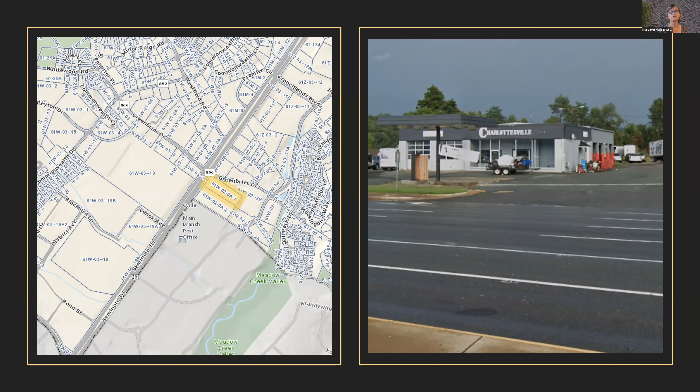This is an application for a Wawa convenience store and fuel pump canopy to be located at the southeast corner of the Route 29 and Greenbrier Drive intersection. The staff report for this application addressed the site plan for the proposal. It did not provide an analysis of the architectural design of the store or the canopy, although there were a few references to architectural issues based on information available in the site plan. There was a glitch at our end in the submittals. The architecture was part of the applicant's submittal and it should have been addressed in the staff report. So in this presentation, I'll first summarize the site plan issues covered in the staff report, and then we'll come back to the architecture.

Regarding the site plan, we did identify some issues that will need to be addressed with the future submittal. They range from landscaping and lighting to issues with equipment, the dumpster, and the canopy. The landscaping does not meet all of the guideline requirements, in part because of the extent of utilities and easements on the property. There are spacing issues: large trees are provided along the frontages, but they're spaced very close together, and there are also gaps in the planting of trees and shrubs along the frontages.

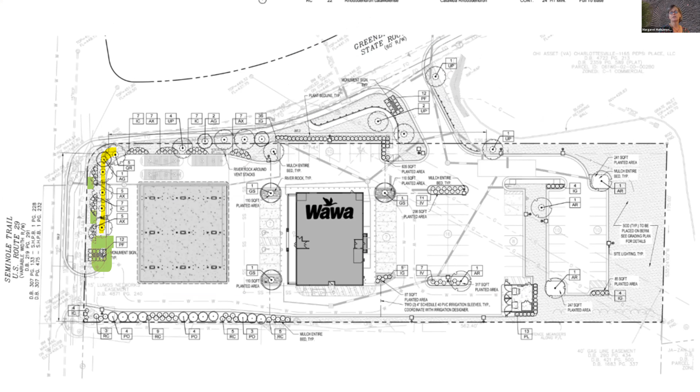Trees are not shown along all the perimeters of parking areas as the guidelines require, and there's no landscaping shown along the property line to offset impacts of the loading area. So we've made recommendations to address each of those issues.

The lighting plan shows that there's excessive spillover at the Route 29 entrance and along Greenbrier Drive, and there's also excessive illumination under the canopy.

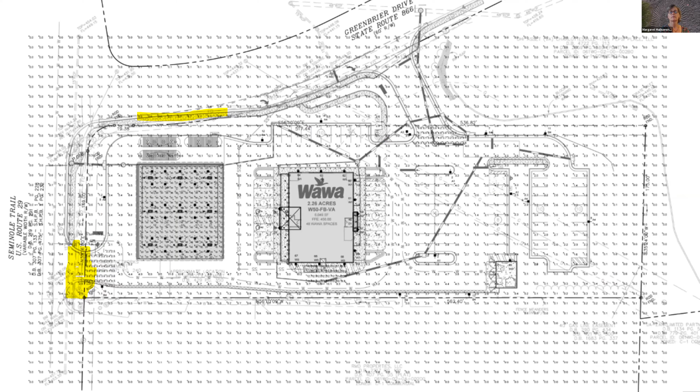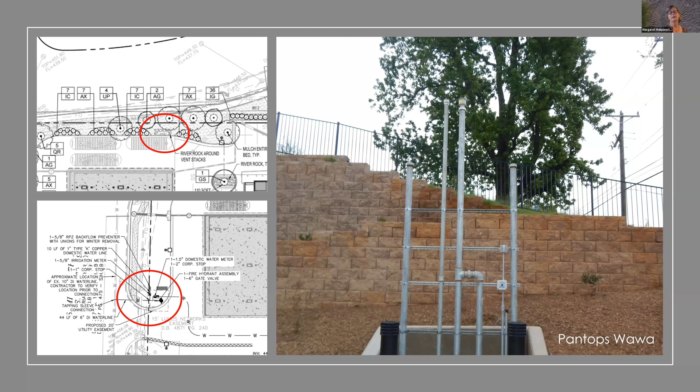In terms of equipment, the vent stacks for the underground storage tanks will be visible from the street. They're located very close to Greenbrier Drive, and a fire hydrant and water meter are located right at the entrance into the site from the Route 29 entrance corridor.

We've recommended moving these items and adding landscape screening. A berm is proposed at the rear of the site, and chain link fence is proposed at the northeast corner of the site. We've recommended grading for a more natural appearance and an alternate fence design.

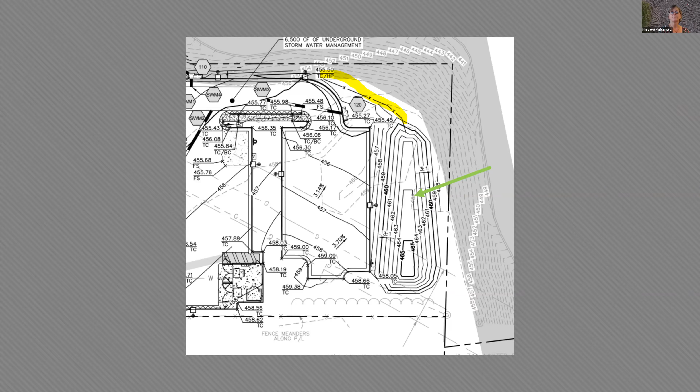The proposal includes a dumpster structure like the one approved at Pantops. The proposed location is right in line with the entrance from Route 29. The Pantops dumpster was approved with gates that are white.

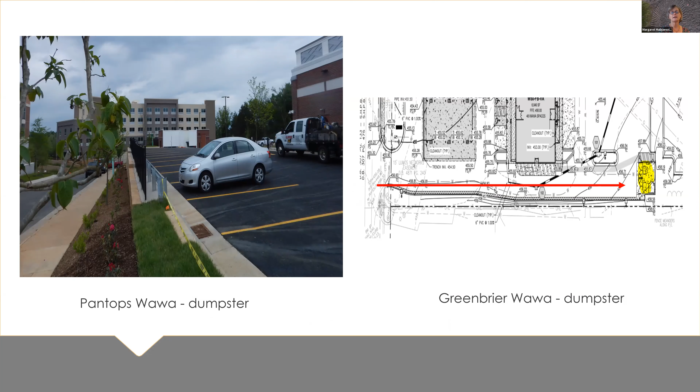That white color really stands out, as you can see in the photo on the left side of this slide. So we've recommended a more muted color that would blend better with the surroundings.

All right, let's talk about the proposed architecture. The design of the store and the canopy are proposed to be the same as what was approved for the Pantops location. There are a few items to note.

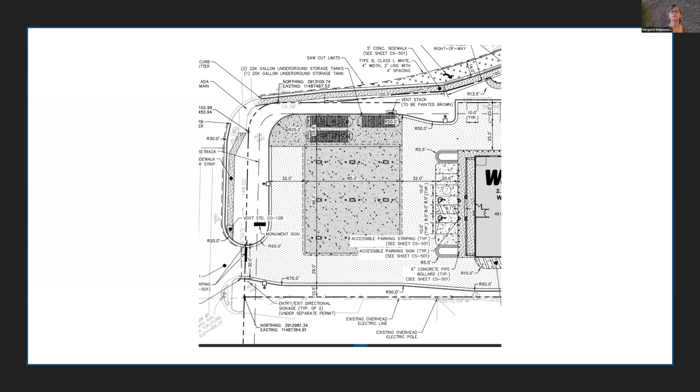One issue is the size of the canopy. The approved Pantops size is 96 feet by 81 feet, and the Greenbrier size on the site plan is 96 feet by 85 feet. So we've recommended revising to the smaller size.

Another issue to note is that the right side elevation of the store building has much greater visibility at the Greenbrier site than at the Pantops location. The elevation does have some detailing, but has no windows and just one service door.

As mentioned earlier, the loading area is proposed along this elevation. So we've recommended that some landscaping be added along the perimeter of the site to offset those visual impacts.

Also, there's a discrepancy in the information for the canopy. The architectural drawings show dimensions like those approved for Pantops, with the bottom of the eave at 14 feet 6 inches, which in earlier reviews was determined to be consistent with the entrance corridor guidelines.

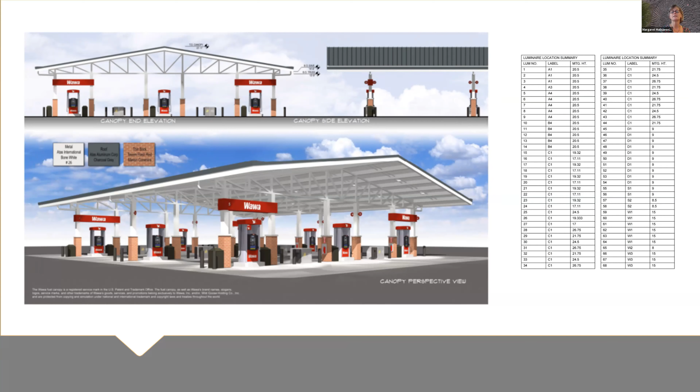The top of the canopy is noted at 22 feet 11 inches in the architectural drawings, but the luminaire summary in the lighting plan shows canopy fixture mounting heights up to almost 27 feet. So the lighting plan doesn't represent the canopy shown in the architectural drawings, and revisions will be needed to the lighting plan. So I'll run through the architectural drawings.

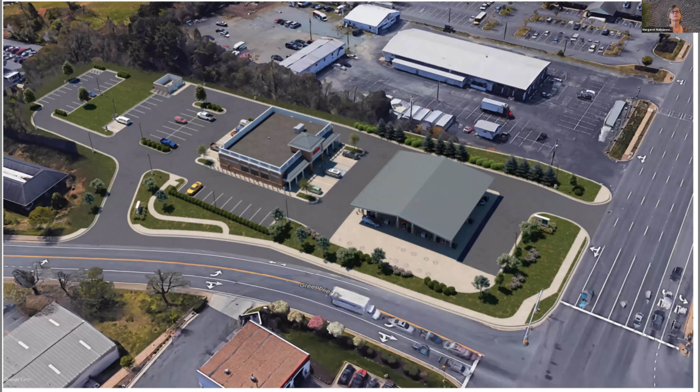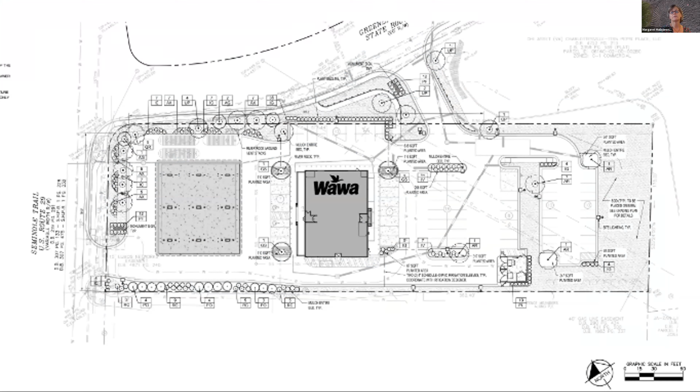As I noted, the design is the same as the Pantops location, and even these drawings still show the Pantops street names. So although the staff report did not include a detailed architectural analysis, the report did address the few architectural issues we identified based on available information. After looking at the architectural drawings submitted, the only additional recommendation I'd make at this time would be to correct the street names in the elevation drawing titles.

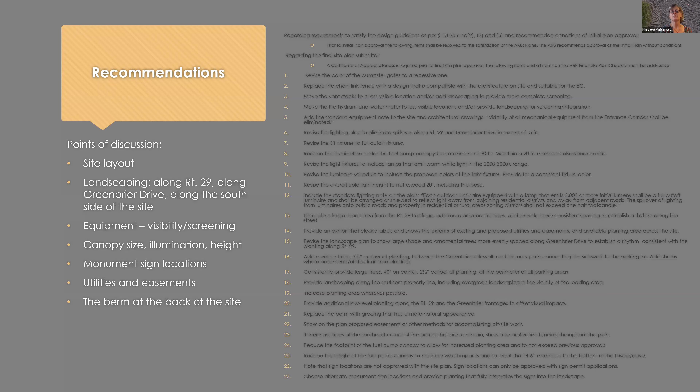So our recommendation is approval of the initial site plan with no conditions on that initial site plan, but with a list of recommendations for the final site plan to be submitted with the next submittal. I'm happy to try to answer any questions that you might have.

I don't have any questions. I have a question for the applicant, but I think no questions for you. Thanks.

Margaret, can you possibly go back to the perspective rendering from 29 heading north? Sure, or looking north? Let me pull that up just a second.

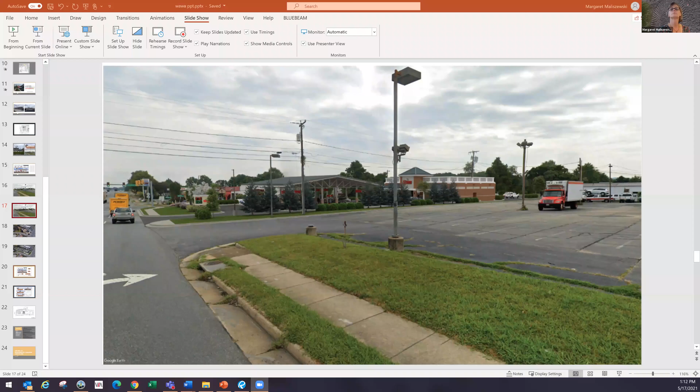Are you able to see the slide? Yep. Okay, great, thanks. Would you like me to leave it up? I think we'll see what the applicant wants to do.

Were there any other questions from ARB members? I just have a quick question, Margaret. Was the door off center on the Pantops building like it is in this application? You remember the front entrance? I guess it's the south elevation. That's a good question, I can maybe check, or the applicant could shed light on that. I don't have those other drawings right here. I'd assumed it was because the labels haven't changed, but... thank you.

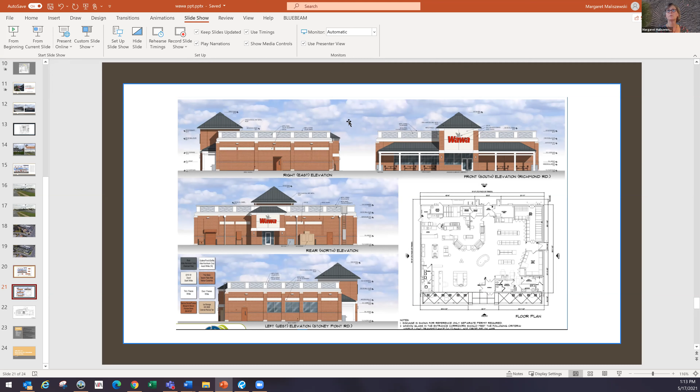Okay, if the ARB members have no additional questions, I think we can move on to the applicant's presentation.

A representative from Wawa who... Yeah, so hello everyone, this is Ryan Perkins with Kimley Horn. We do have Jeff Bell from Wawa on the line as well, and we have Mark Fontaine, the developer with Knoll Consulting, and myself with Kimley Horn and Carter Baum in my office as well. I don't have a presentation prepared, but I can share my screen and run through and address some of your comments. So I'll try to share my screen.

Are you able to see my screen? We are. Good, okay. Just a little bit about the project: we're on the corner of 29 and Greenbrier. It's an existing auto repair service. Here's the oblique rendering that Margaret had previously shown. Our parcel extends pretty far back into the woods, it's a long rectangular shaped parcel, and we're totally wiping out everything on the site today and moving forward with this layout.

So the layout, as Margaret mentioned, is very similar to the layout proposed at the Pantops Wawa, where we have 9 MPDs, the same 6,000 square foot convenience store, and the same amount of parking spaces, which is the code minimum. We have one entrance on 29 and one entrance on Greenbrier at this time. We also have a parking lot in the back that's part of a negotiation with this rehab hospital in exchange for us doing some improvements on their parcel, a small triangle along Greenbrier. Wawa is going to install 20 parking spaces for them to use.

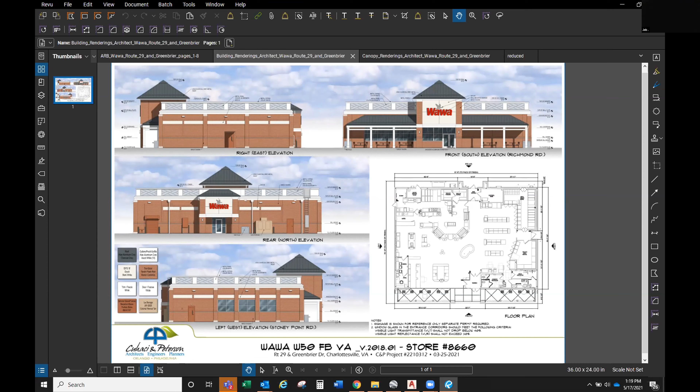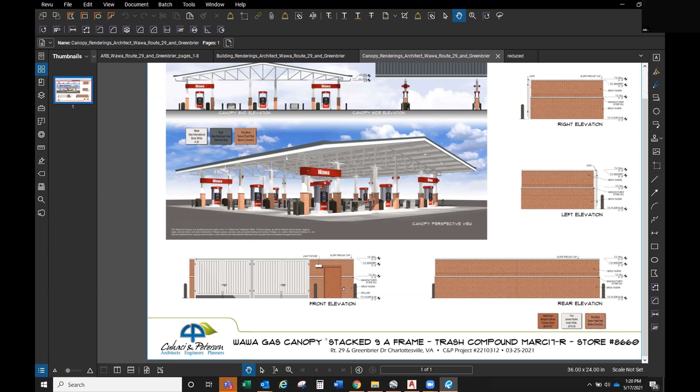And then the other comment I heard was about the trash compound door color, and I agree. I think when you look at that on its own, it does look pretty stark, and I agree, a more muted color would look better. I guess my concern is that the white matches the building, and if that were gray or something, I don't know, I can talk about it with the design team, but then it wouldn't match the building, and then is that more awkward? I don't know, but I wanted to get your thoughts on that. But I'll stay here if you got any more questions for me.

And Margaret, I'll also point out, you mentioned the heights that were in the lighting study for the fuel canopy. Yeah, those are off, so we do need to reduce those heights and fix the lighting plan for you.

I should have mentioned that I have additional photos of the Pantops location if anyone wants to see something there, and I can show you the entrance there if you want to see that.

So Ryan, just to summarize, of the recommendations made, which ones can you guys not achieve?

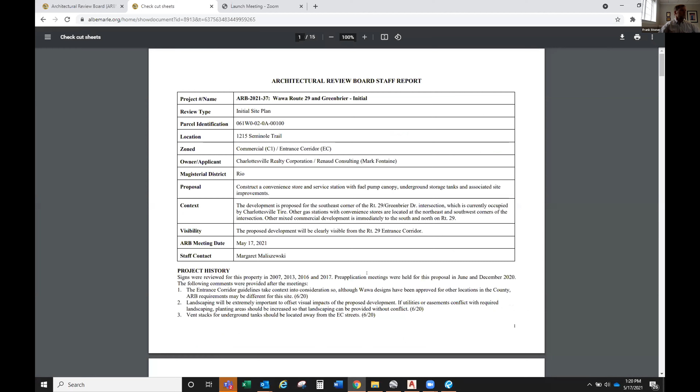I mean, all the recommendations were manipulating some of the landscaping, and we don't have any problems with that. We were showing a berm in the back with a chain link fence. We can make it more of a free form berm in the back and remove that chain link fence and go with a different type of fence. So that's not going to be an issue. All the landscaping around the two frontages are not going to be an issue.

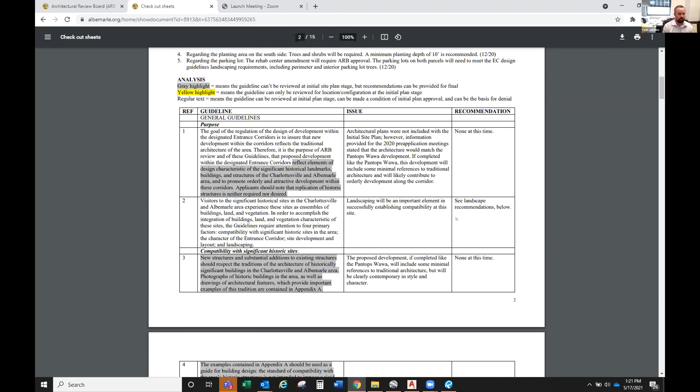It sounds like Jeb's willing to address some of the architectural changes. The lighting comments, some of those are just plan errors that we will have fixed. So I'm scrolling through them right now. I don't think, and I can go to the list at the bottom, I don't think offhand that we have a problem with any of these.

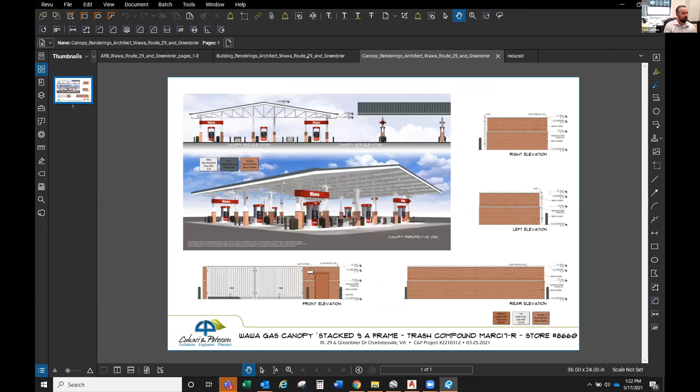There was one comment related to the right side of the building and the blankness of that wall, I think. And the building is far enough back, I'm not sure it's a huge issue, but I don't know whether it's in there as a recommendation or requirement. Yeah, I thought that was noted, and it was just to add whatever landscaping we can versus make changes to the building. That's right. Okay, so we'll do what we can on that side to add some additional landscaping.

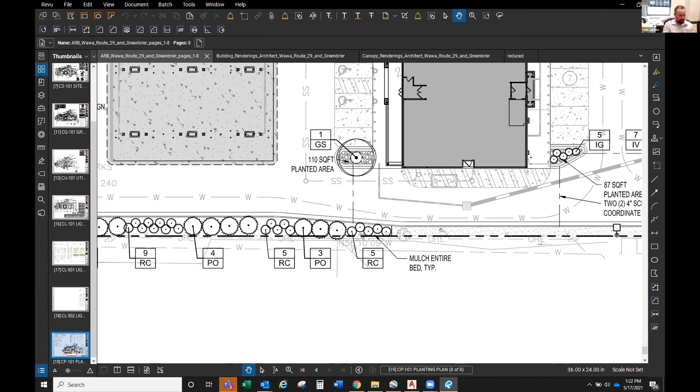And I'll pull up my landscape plan just to show you what we're working with. Unfortunately, there's overhead electric lines right along the property line, so that's why we haven't gone with large trees. But we could certainly put in some shrubs that don't grow up beyond 10 feet, or maybe some columnar trees, so I think we can definitely help with that.

And we can provide a line of sight that shows where the building to the south of us comes into play in terms of the line of sight and when this would be blocked from view.

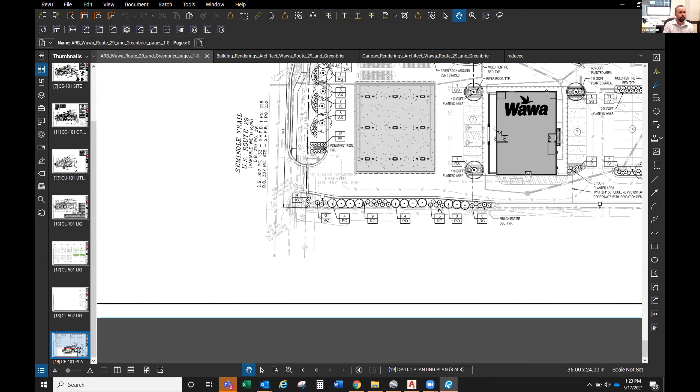The berm at the rear of the site that's mentioned in the staff report, what is the purpose of that?

Well, so the rehab folks behind us, they wanted some type of separation or block from the property. So they asked for a fence, and we just decided to add a berm as well. We have a fair amount of excess cut on the site as well, so part of that was not hauling it off.

So the conversation we had last week with, I believe it was Charles and Margaret, was to make this more of a free form, make it look more like it fits in versus just a mound of dirt. So we have plenty of flexibility in the back portion of the site, this is the only part of the site where we have flexibility. So we told Margaret we'd work with her on that one. Okay, thanks.

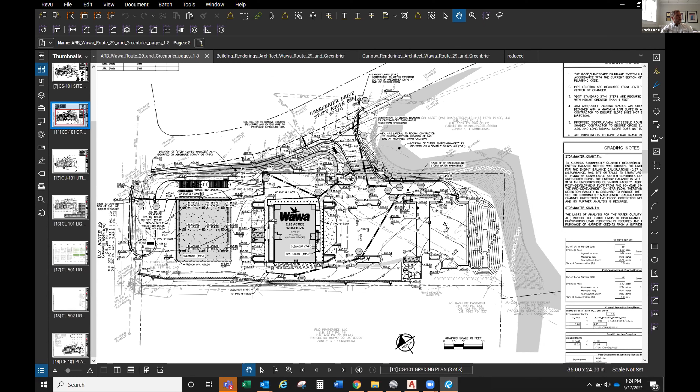Any other questions for the applicant? No, I don't have any questions. Okay, well, we'll close that section of the hearing and move to discussion.

Frank, can we ask Carol if she knows if there's anyone who's from—oh, right, yeah, sorry. Carolyn, is there anybody from the public who has a comment or question about this? I don't have anybody with their hand raised. Okay, great.

Chris, Frank, any thoughts? Chris, why don't you start with you?

I think it's a really nice site plan, with the relegated parking. I think the amount of landscaping, getting that extra 10 feet out front, is something we struggle with on this corridor, in particular the overhead lines and trying to manage program with meeting these frontage landscaping requirements. I think you guys have done a great job doing that.

So yeah, I think the initial site plan looks great. As far as the architecture, I feel like we know this pretty intimately, having spent lots of time with this building and this canopy. So I really don't have any comments there either.

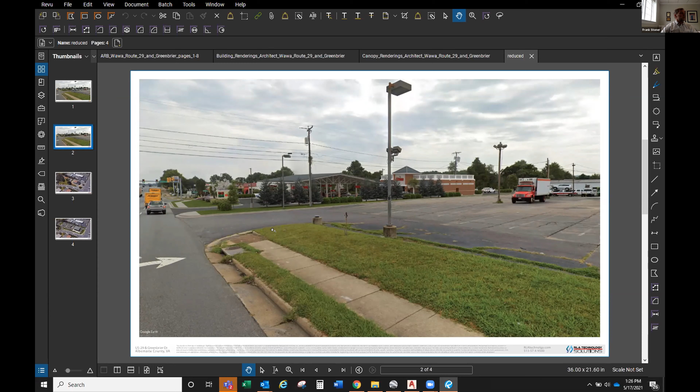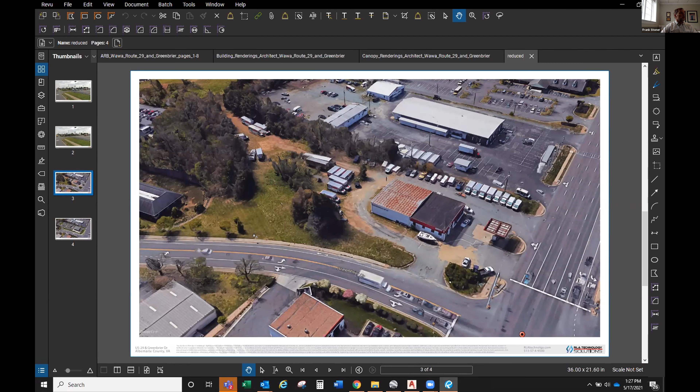And I'll echo what Frank and Chris have just said. I think it's a nice site plan. It's obviously an enormous improvement from what's there now. It's a low bar to get over, but I think you guys have done a nice job with the site. And obviously we know what it looks like because we got a couple of them up already. So I don't have any other questions or issues with what's been presented.

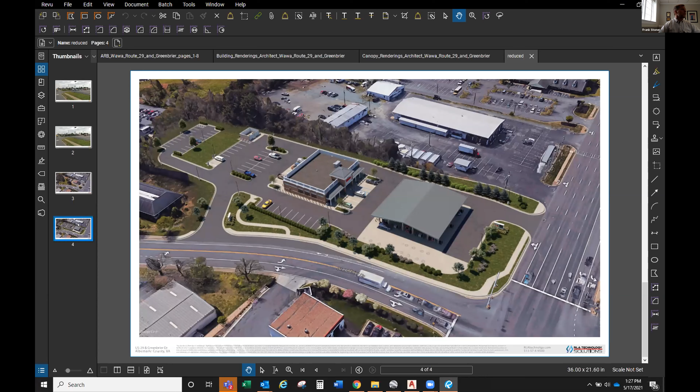Margaret, what action? Pull up the action memo so we can, just a second, let me pull that up.

Can you see the Word document? Yes.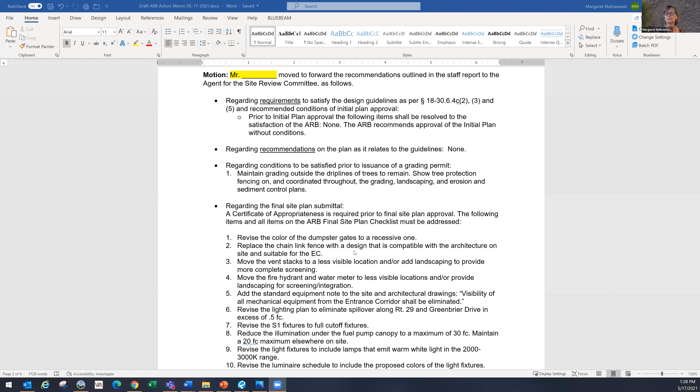So the action for today is on the initial plan. This is our standard format. You've got sort of 4 different sections to it. The first bullet being recommending approval of the initial plan without any conditions. And then we have just the list of all the recommendations, the 27 comments for the next round of review. I've added here in red just to correct the street names referenced in the architectural elevations. That would be the only change from what was in the staff report.

Anybody want to make a motion? I'll move to forward the recommendations outlined in the staff report to the agent for the site review committee.

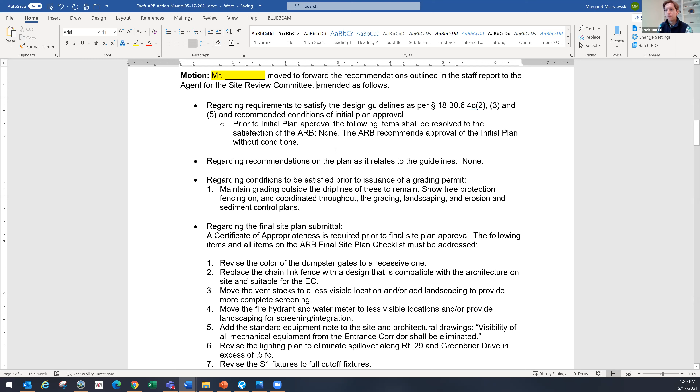We didn't have any amendments, did we, Margaret? One amendment was that last item, item 28, which reads, correct the street names referenced in the architectural elevation drawing titles. Yes, sorry about that.

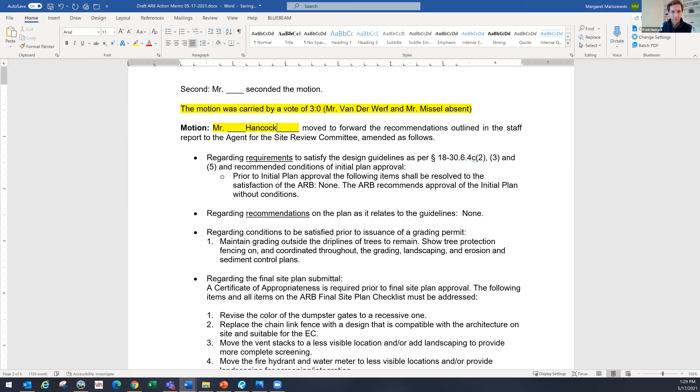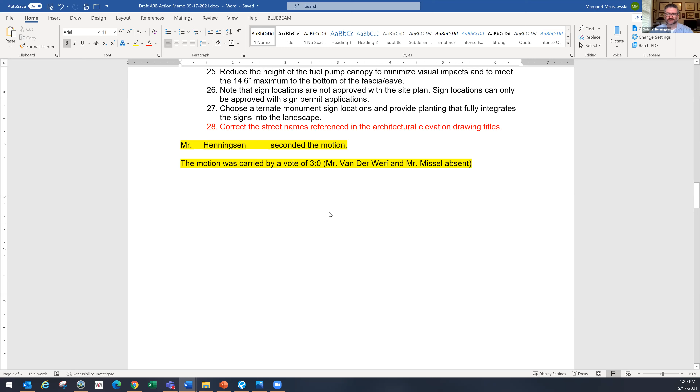So I'll second. Stoner, Aye. Mr. Hancock, Aye. Mr. Henningsen, Aye. Thank you. Thanks, everyone.

All right, we're going to move on to the regular review items. The first one on the list is ARB 2021-40, Scott's Ivy Exxon final site plan. Thanks, Frank.

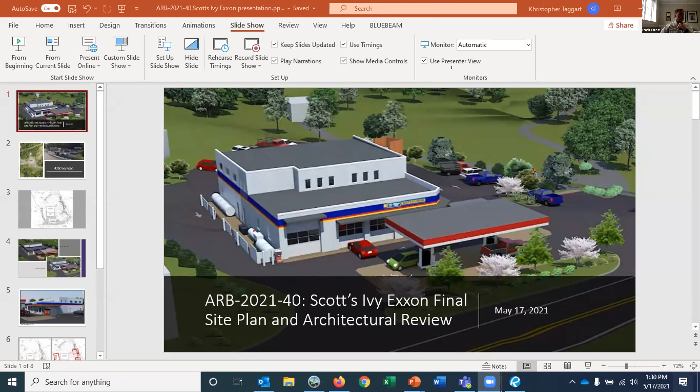The application I'm presenting on is the review of architecture and final site plan to construct a 3,200 square foot addition to the existing service station and to complete associated site improvements. The site is located at 4260 Ivy Road on the north side of Route 250, approximately 265 feet east of the Route 250 and Ivy Depot Road intersection.

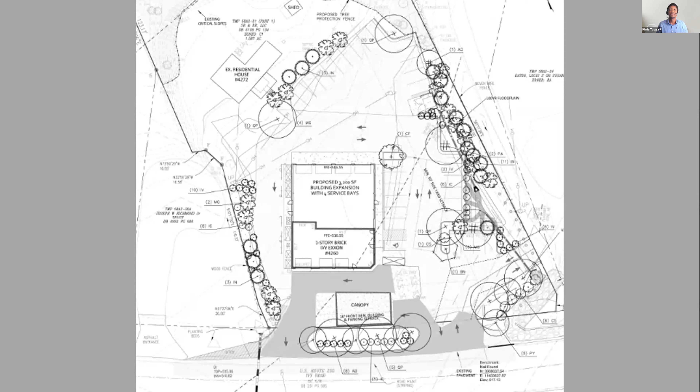On January 4th, 2021, ARB provided comments on the preliminary architecture and recommended approval without conditions on the initial site plan. The focus of staff's comments on the site plan and architectural drawings, as highlighted by the primary points of discussion in the staff report, center on the building design and landscaping in the perimeter parking area.

With regards to the building design, windows have been added to the second story of the concrete block portion of the addition, and the windows on the corrugated metal portion have been shifted up to align with them. The windows on the second story of the south end of the building help relieve the blankness that was present along this elevation.

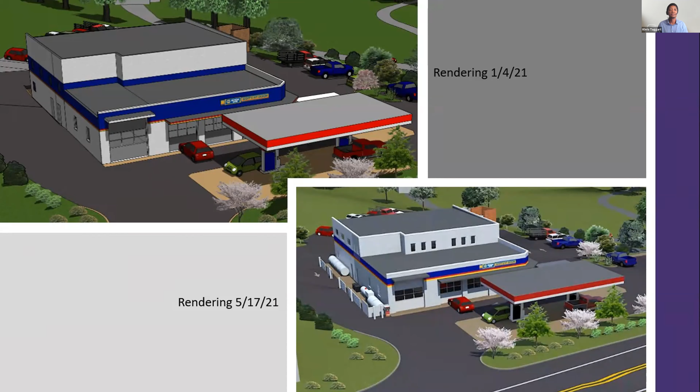Material and color samples have been provided as requested. The sample confirms staff's concerns regarding the utilitarian nature of the materials and the branded nature of the proposed colors. Reducing the blue band by 2 feet in height and shifting the color stripes are positive changes, but

the placement still emphasizes the trademark nature of the design, and the use of the light gray color emphasizes the mass. Maintaining the red brick of the existing building, replacing the color stripes with architectural detailing, and using a more muted earth tone color for the addition may allow for some minimal painted corporate colors to be used.

Regarding landscaping proposed for the site, the plan has been revised to show trees and shrubs along the western perimeter, consistent with the rest of the site.

Along the perimeter of the parking area, 4 large trees are shown. However, 2 additional trees are required, and the 2 trees proposed north and south of the stormwater facility may conflict with nearby pipes and hardscapes.

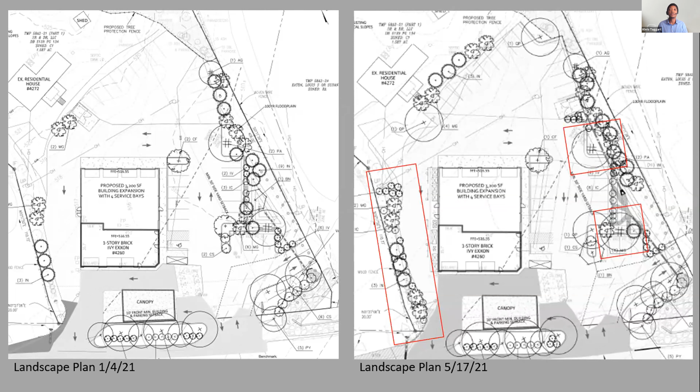In the report, staff had recommended shifting the 2 trees to the east of the stormwater facility, but after further review, the easements along the facility do not make this recommendation feasible. However, 2 additional trees are still needed along the perimeter of the parking area to satisfy the landscaping requirements.

Because of the outstanding architectural issues, we have not recommended approval of the final site plan at this time, but have provided a list of recommendations. I'd be happy to answer any questions you all may have.

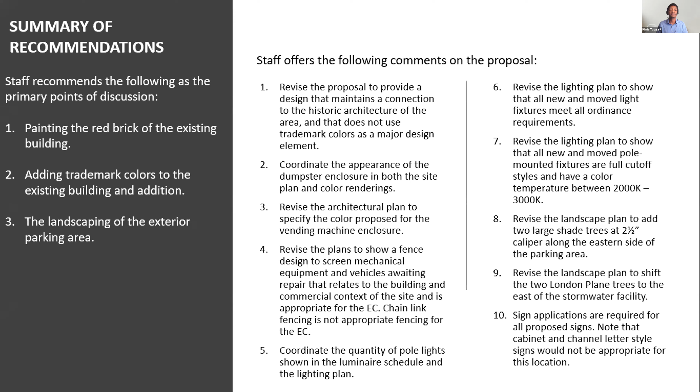Right, I don't have any questions. Thanks, Khris. I don't have any questions either at this time.

Do we have a representative of the applicant here? Yes, this is Scott Collins with Collins Engineering. We also have the architect, Mark Kessner, available to talk about the project.

Overall, I'll start with the site aspects of the project, and then I'll let Mark talk more about the architecture. But from a site standpoint, I wanted to talk about 2 things related to this project.

One was about the screening on this site, specifically the area where the cars are being stored for repair. This was a pretty big discussion during the special use permit process,

and what makes this site a lot different than a typical auto or body shop is that there's no difference between what the car looks like on this site when it's awaiting repair versus a car that's complete. The cars don't come in pieces. It's just a service station, not an auto body repair shop.

They're not taking cars that have been in accidents. So really the car looks like a regular car just parked in a parking lot.

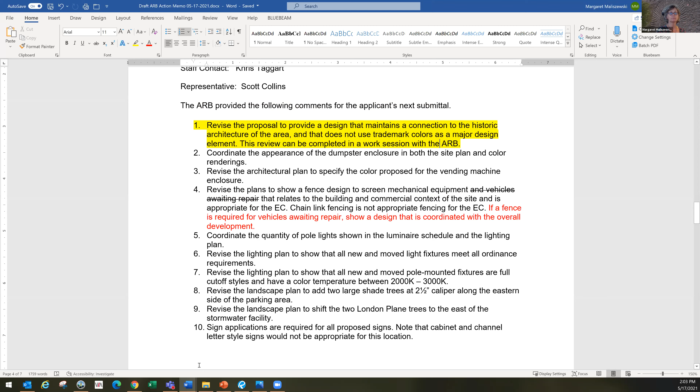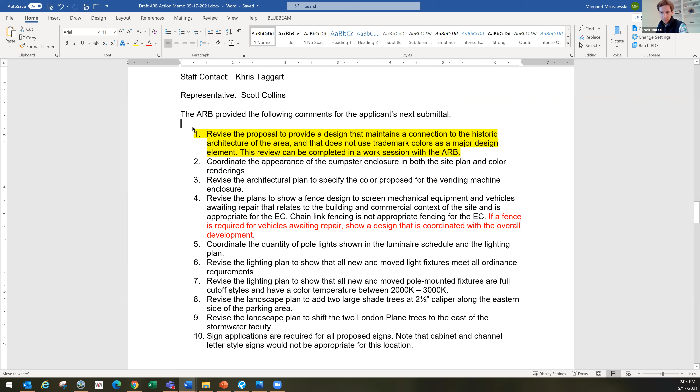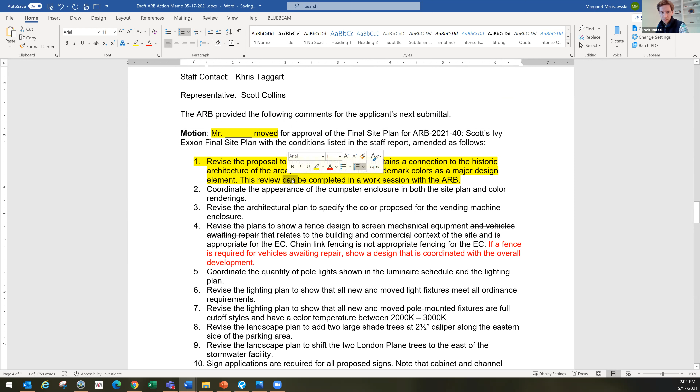We would make a motion for approval with these conditions, and that would ensure it would come back as a work session for just the architecture. So all the comments in the staff report would basically be conditions of final approval, but the architecture and color would need to come back, would be required to come back in a work session prior to that.

Frank, I don't have any other comments. No, I don't either. I think you would have to move though. Yes.

I'll move for approval of the final site plan for ARB-2021-40, Scott's Ivy Exxon final site plan, with the conditions listed in the staff report amended as follows. Number 1, add: this review can be completed in a work session with the ARB. Item number 4, strike 'and vehicles awaiting repair.' Add the following sentence: if a fence is required for vehicles awaiting repair, show a design that is coordinated with the overall development.

I'll second. Okay, Mr. Stoner, aye. Mr. Hancock, aye. Thank you.

The application I'm presenting on now is the review of architecture and final site plan to construct a 1,200 square foot building to accommodate a drive-through Starbucks, in addition to associated site improvements. The site is located at 2231 Seminole Lane. On March 1st, 2021, the ARB provided comments on the preliminary architecture and recommended approval without conditions on the initial site plan. Staff did have a number of minor comments on the site, but none of them were significant enough from keeping us from recommending approval of the final plan.

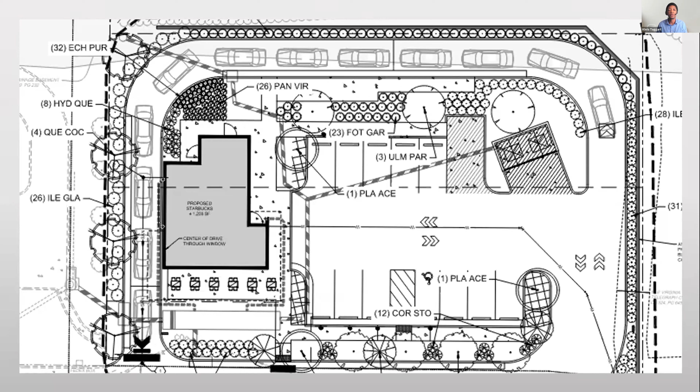So the focus is on the material samples provided and the 3 points listed as primary points of discussion in the staff report. Other than removal of the mural from the south elevation, no changes have been made to the building design. In the review of the preliminary architecture, staff noted that the bond pattern, brick color, and strong texture of the walls contributed to a somewhat utilitarian appearance. However, the masonry samples provided, while not the traditional red brick, illustrate a brick color as a warmer tone that would be compatible with the surrounding context.

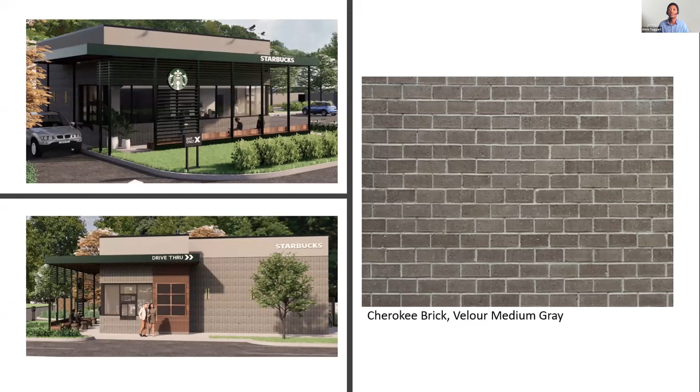Regarding the mechanical equipment, the architectural plans have been revised to show the location of the roof-mounted equipment, but it's still unclear whether the equipment will be visible from the entrance corridor and if any ground-mounted equipment is proposed. Staff recommends revising the architectural elevations to show the location and height of the roof and wall-mounted equipment, and revising the site plan to show the location of ground-mounted equipment, or indicate on the plans that no ground equipment is proposed.

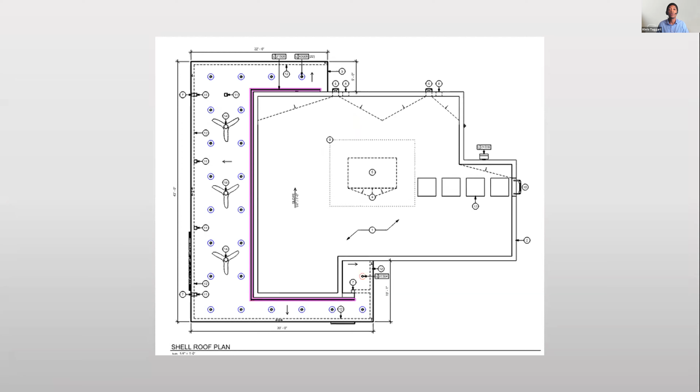With regards to the landscaping for the site, the plan has been revised to reduce the width of the travelway at the south end of the site to allow for 2 additional large trees to be provided along the western perimeter. The spacing still exceeds 40 feet near the travelway at the north end of the site, but the trees provided exceed the minimum planting requirements.

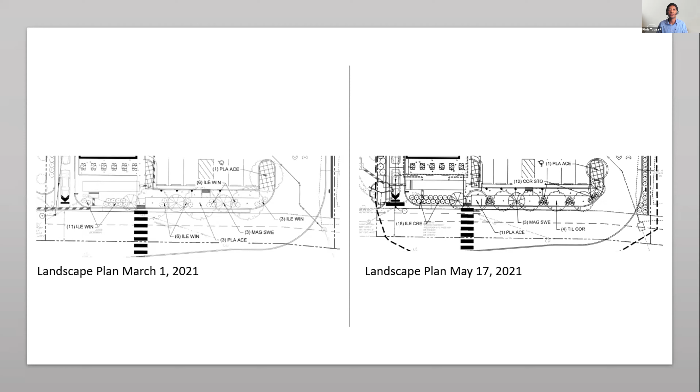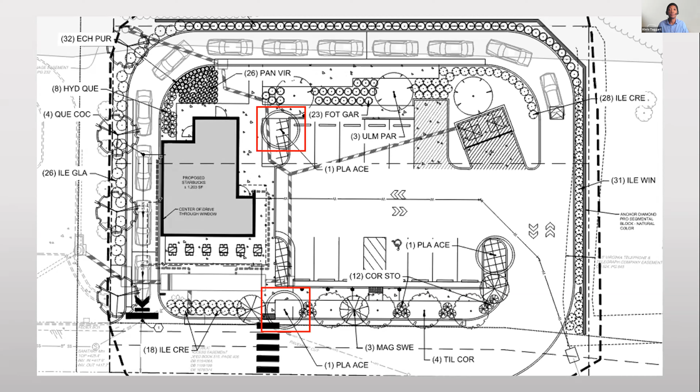The species layout and limited planting area, however, will likely result in overcrowded trees and conflicts with surrounding hardscapes. Between the parking area and the drive-through travelway, trees that meet the spacing and caliber requirement and additional shrubs have been provided. However, there's a potential landscaping conflict at the northeast corner of the parking area due to a nearby pipe. Staff recommends removing the London plane trees at the northeast and northwest corners of the parking area to avoid landscaping conflicts.

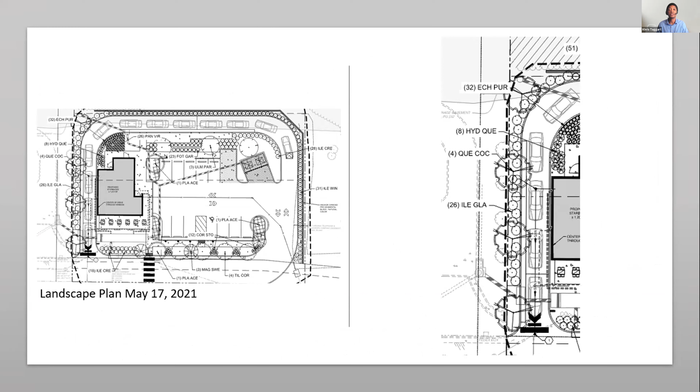Between the northern perimeter of the site and the drive-through travelway, the plan now shows 4 scarlet oaks with shrubs interspersed. Due to the limited planting area and their spread once mature, the proposed trees have the potential to conflict with the drive-through travelway and the landscaping on the adjacent parcel. Staff recommends replacing the scarlet oaks with medium-sized trees or more narrow columnar species. Staff recommends approval of the final site plan with the revisions in the staff report. I'd be happy to try to answer any questions that you all may have.

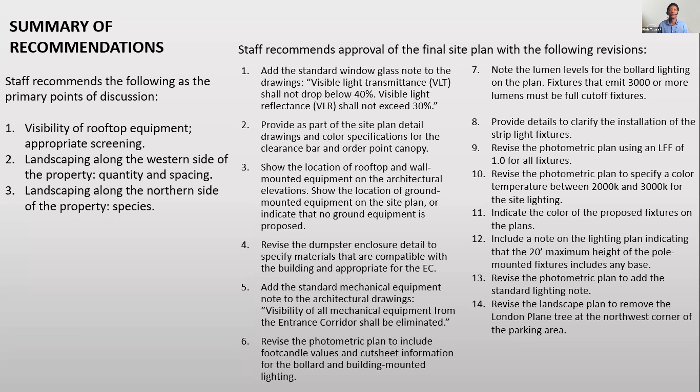I don't have any questions. Thank you, though, for your presentation. I don't have any questions either. Chris, thanks.

Is there a representative of the applicant who wants to speak? Yes, hi, I'm Anna Fontaine from Timmons Group. Can you hear me okay? Yes, we can.

Thank you for that presentation, Chris, that was a good quick summary. I was actually hoping to clarify which trees, since northeast and northwest were referenced, but I wanted to clarify which ones you wanted removed. That screenshot did help answer that question.

We do not see any major issues here on the roof mounted equipment. The intent is that it will not be visible from the road, and Martha is also online here, so I'll pass it over to her shortly. The only other things I wanted to address were that there were details you had requested that we will add to the site plan, no problem.

I think Martha will also speak to some of the colors of the walls and dumpster enclosure. And I think anything regarding the photometric plan, we are coordinating and we'll get that updated for you. I think that sums it up. Martha, do you want to take over and talk to some of the architectural points?

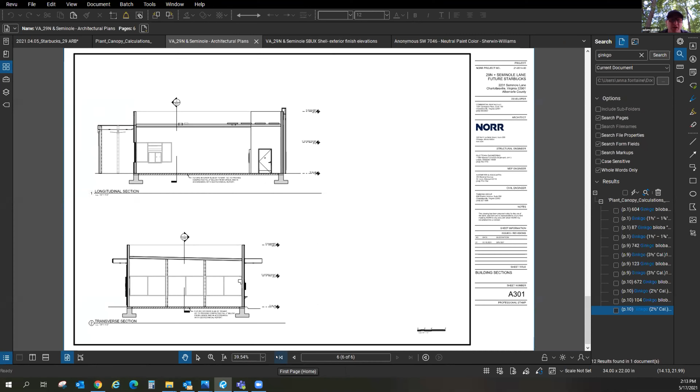This will be a drive-through only location at the intersection of 29 North and Seminole Lane. This will be the only Starbucks location on the northbound side of 29 in Charlottesville. The location will feature channels for our patrons, including drive-through, curbside pickup, window for mobile orders, as well as traditional point of sale. The site will enjoy a large covered patio seating experience, providing the community and travelers an area of respite outdoors, surrounded by beautiful landscape and design.

I would pass it off to Martha to speak to design, but she already spoke a lot to it. So unless there are any questions about Starbucks operations at the site or how the store will trade, I would hand it back off to Anna.

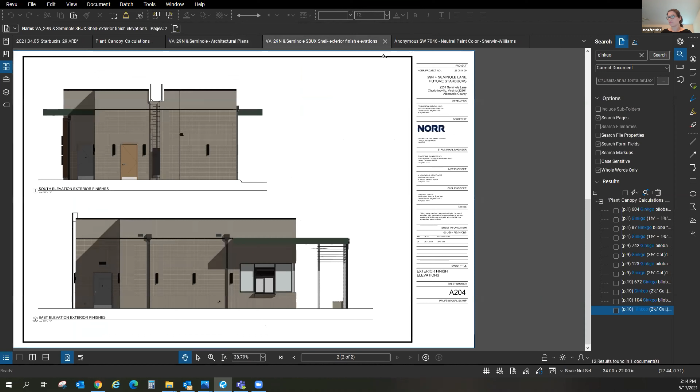Can everyone see my screen? Is that showing up? Yes. Okay great, so here are the color elevations. But this is all, Chris, just to be clear, this is what we submitted to you, so this is what you have seen. Nothing's changed thus far on these plans.

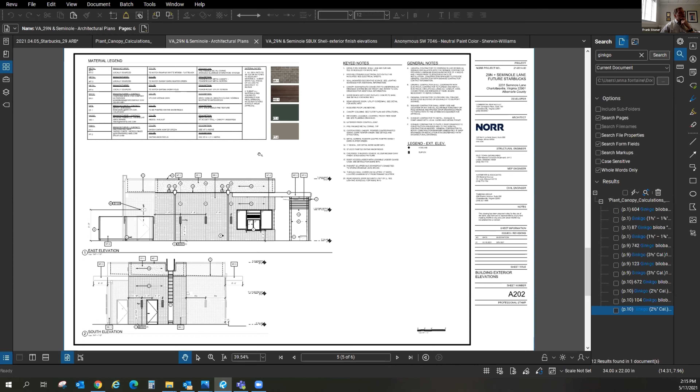And what's the brown material on the building? Is it wood-like? Yeah, this portion, I guess the color is looking kind of weird on this. Let me see if I can pull up a better one. Yeah, that portion is going to be a wood accent. Yes, we can see it better on the 3D.

And at one point there was talk about a mural on the wall next to that. Is that kind of off the table now? It's... I'm not sure.

Oh good, did you want to go ahead, Martha? Yes, I was about to tell the board that it's not out of the question, but we want to pursue the approval of the mural in another presentation and another submission.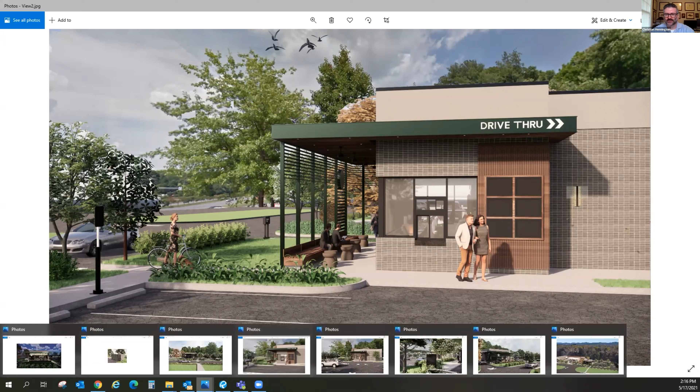Chris, any questions for the applicant? No, my one question, which was the height of the parapet, was answered during the presentation. Based on one of the other renderings where you get an overhead view, it didn't look to me like that was really going to be much of an issue. It might have been the last rendering where the equipment is visible, but I don't think it would be visible from the ground. And that would be the intent. Yeah, yeah.

And also just to circle back, well, Martha covered the walls, so never mind.

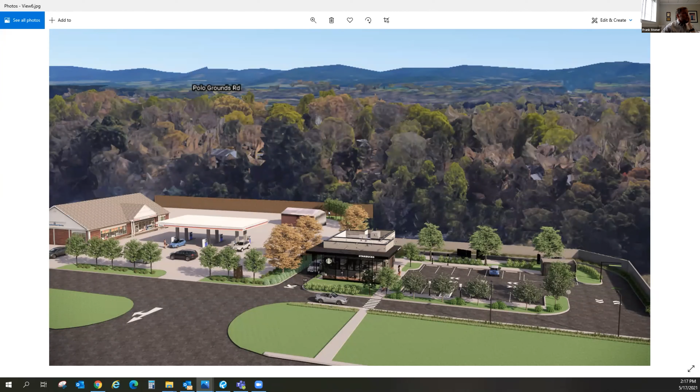I don't have any further questions. Are there any members of the public who wish to speak to this matter? Not at this time. Okay, we'll close the public hearing.

Chris, what are your thoughts? Yeah, I don't really have any concerns about this. I thought staff comments were reasonable. I think moving the issue of the mural to another venue or later date is a good idea. And even without the mural, I didn't see anything that was remotely objectionable about the proposal.

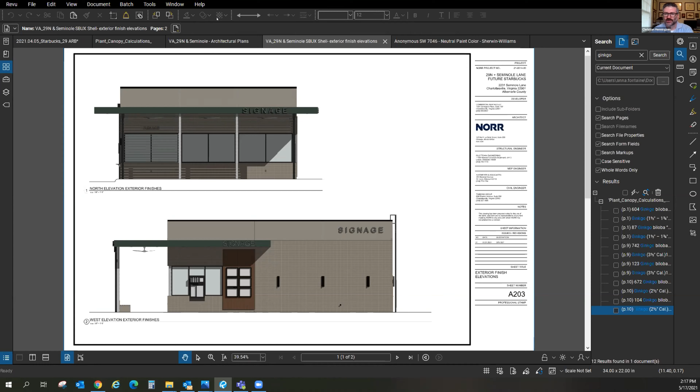To me, I didn't have any concerns that were above what was mentioned in the staff report. Nor did I. I think it's a really nice plan. I'm not used to us asking people to take trees out, but I understand the reasons. So I don't have any further questions, and I'm comfortable with the recommendations from staff and comfortable with what's been submitted.

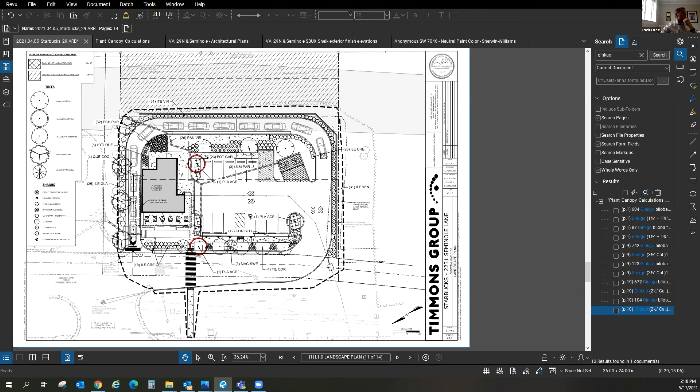Margaret? Or Chris? Can you see my Word document?

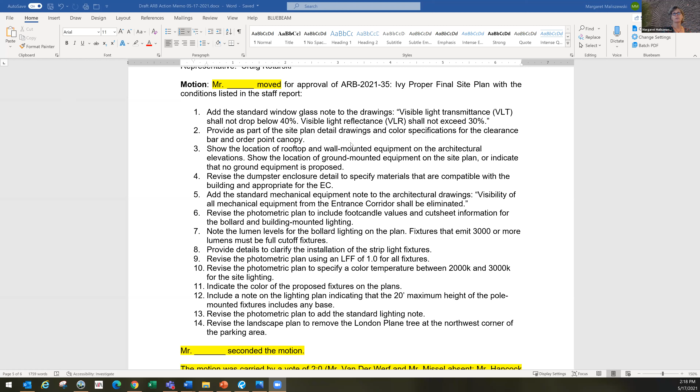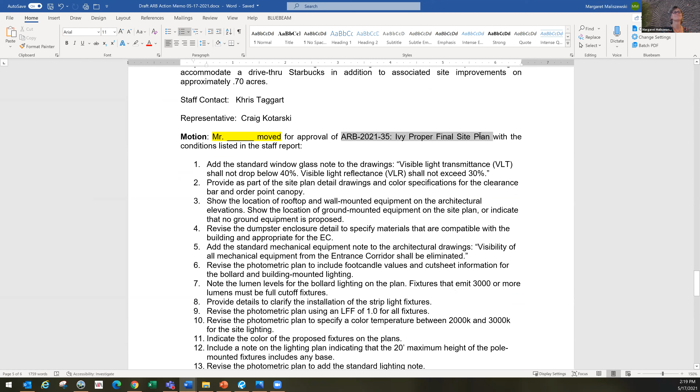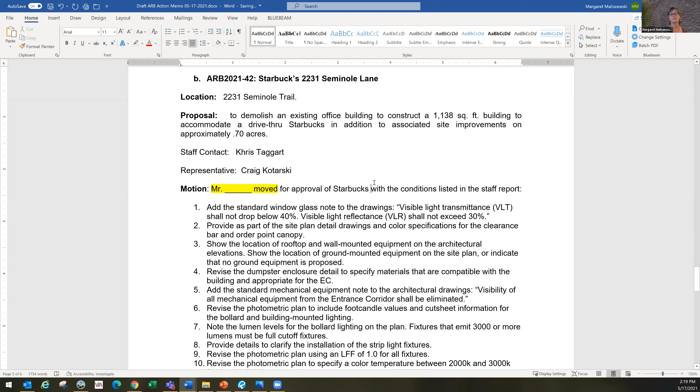Yes, great. So this is the recommendation that was in the staff report. It was a recommendation for... hold on, I've got the wrong name in here. Don't look at this. This is a recommendation for approval of the Starbucks at 2231 Seminole Lane with the conditions listed in the staff report. And from your discussion, it didn't sound like any of these 14 items needed to change.

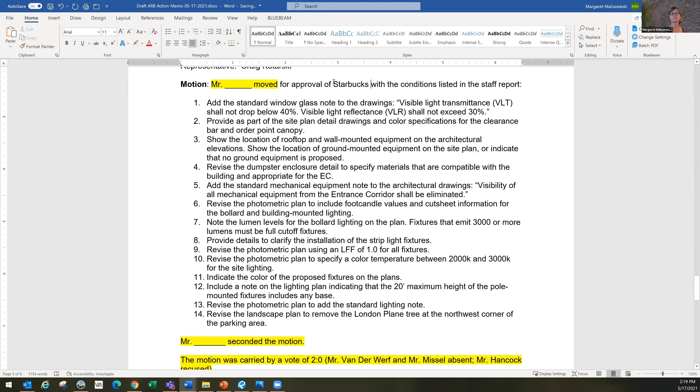Is the applicant comfortable with these conditions and recommendations? I guess that's a question for you. Yes, we feel good about these and don't foresee any issues addressing all of the recommendations. Okay.

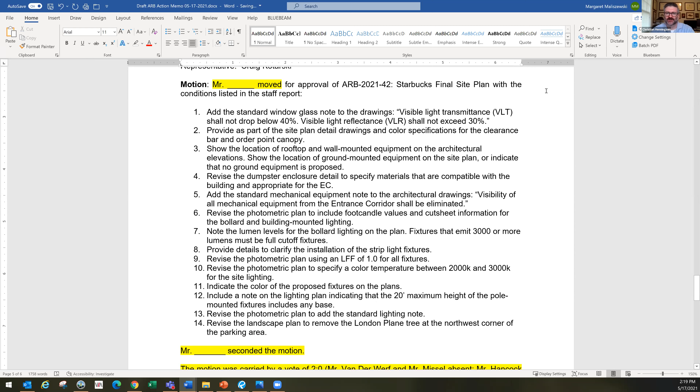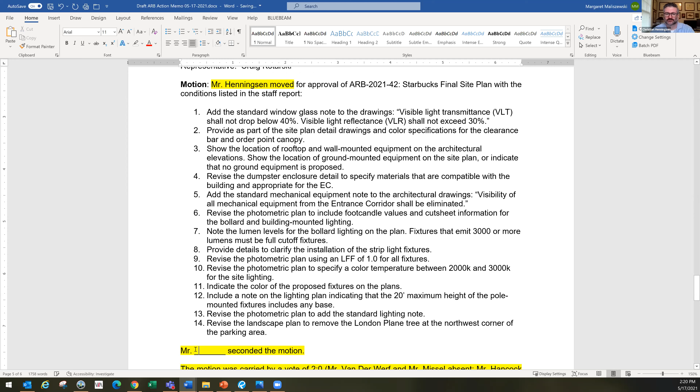All right, I'll move for approval of ARB 2021-42 Starbucks final site plan with the conditions listed in the staff report. Mr. Stoner, aye. Mr. Henningsen, aye. Okay, thank you.